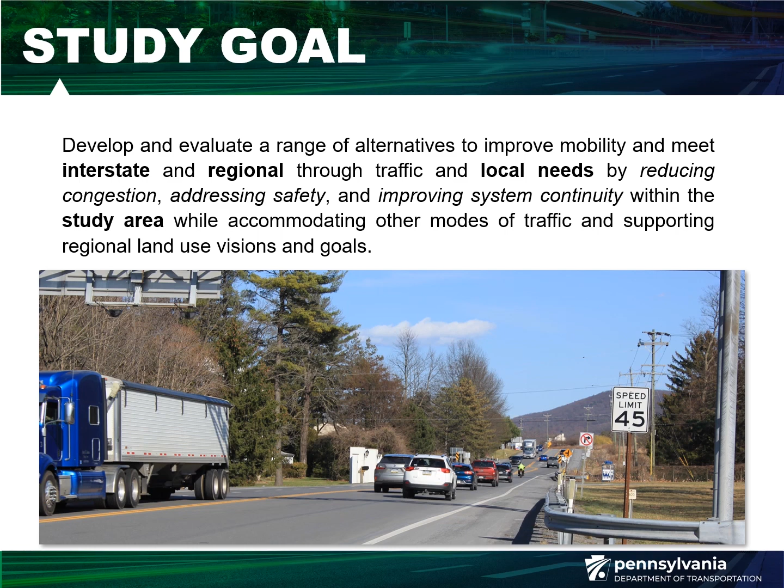Since September, PennDOT has been working to refine the traffic analysis to better identify and understand how traffic is moving through the study area, specifically the various trip origins and destinations. PennDOT used traffic data collected by an independent company called Streetlight, which tracks electronic data from vehicles or cell phones at identified roadway locations. This information documents trip patterns, allowing engineers to enhance the traffic model to predict future traffic for the alternatives. The model can provide a comparison on how the various build alternatives meet the purpose and needs and the roadway network functions.

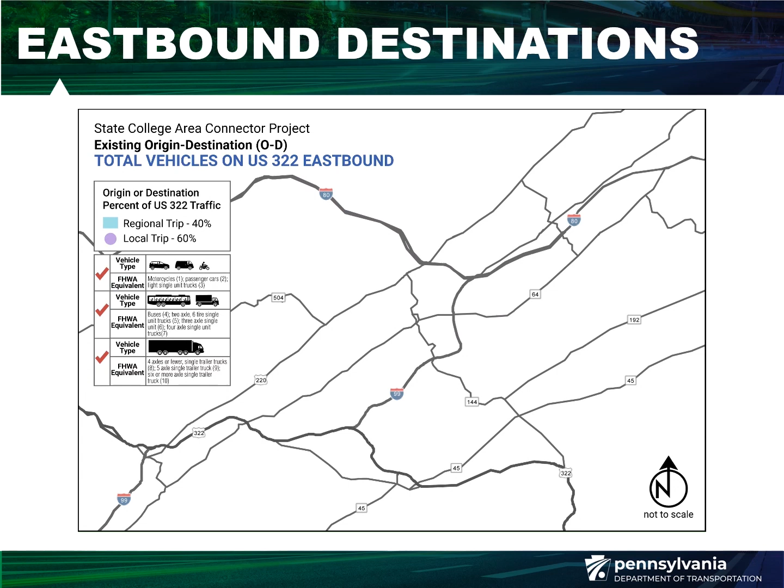The origin and destination study was updated to better identify local versus regional trips by endpoint, direction of travel, and vehicle type such as passenger vehicles and trucks. The traffic analysis determined that nearly 40% of eastbound trips by all vehicle types through the study area were regional in nature, meaning that the starting and ending point of the trip occurred outside of the traffic study area. Conversely, nearly 60% of all trips were local, meaning either the beginning or end point of the trip was within the traffic analysis area for the study.

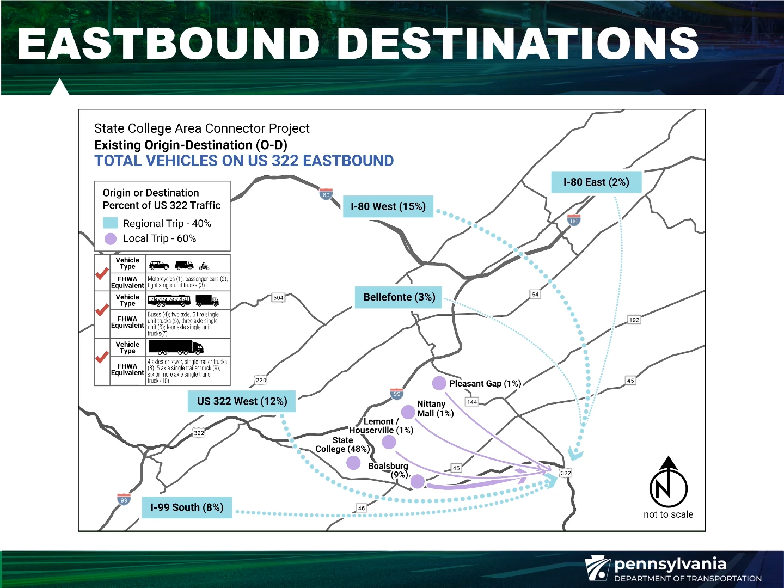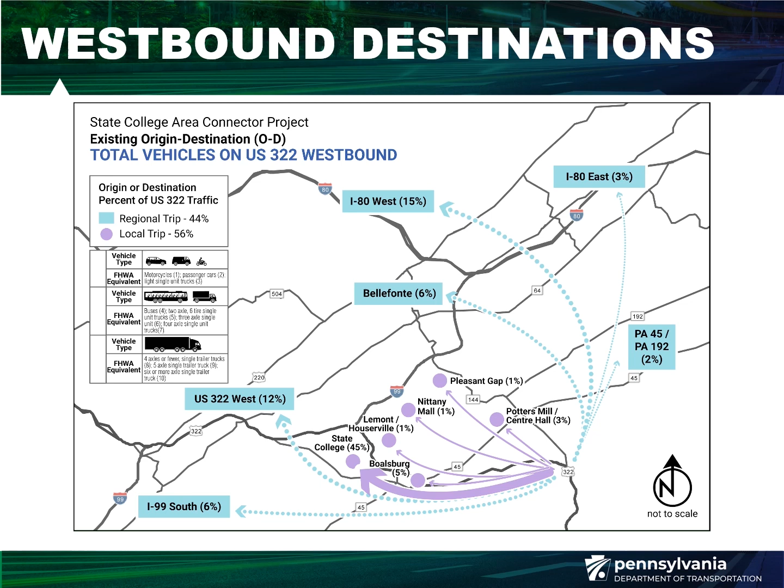Westbound traffic through the study area showed similar results, with 44% of trips being regional and 56% of the trips being local. For both scenarios, the State College area was the origin or destination for more than 50% of all trips. Notable differences were identified when comparing the traffic patterns of passenger and truck vehicles, including heavy trucks such as semis and medium trucks such as local delivery vehicles. Nearly 85% of all trucks traveling eastbound were regional trips, with over half of those trips originating in northwest Pennsylvania or beyond by way of Interstate 80. Only 15% of eastbound truck trips were local trips. Westbound truck trips had similar travel patterns.

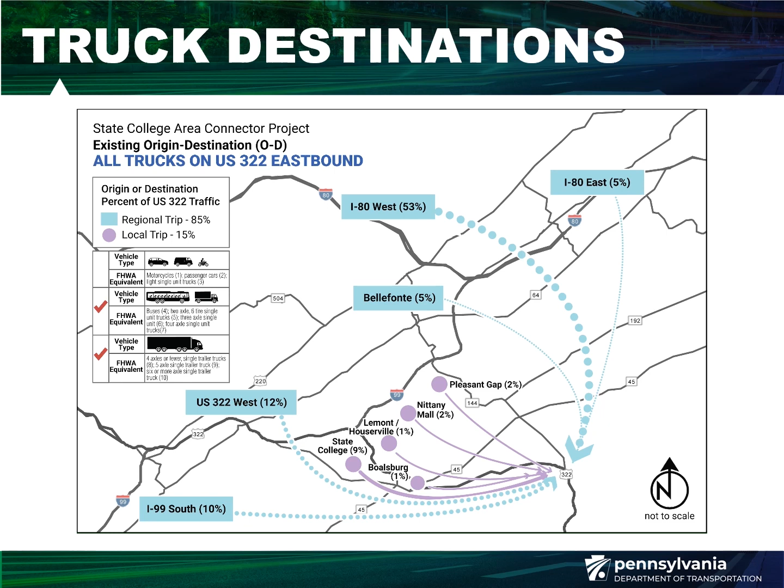Conversely, over 70% of all passenger vehicles traveling both eastbound and westbound were local trips, either originating or ending within the study area. In summary, the findings of the origin and destination study confirmed that passenger and truck vehicles have different travel patterns, and there is a transportation need in the study area to develop solutions to address both modes of travel.

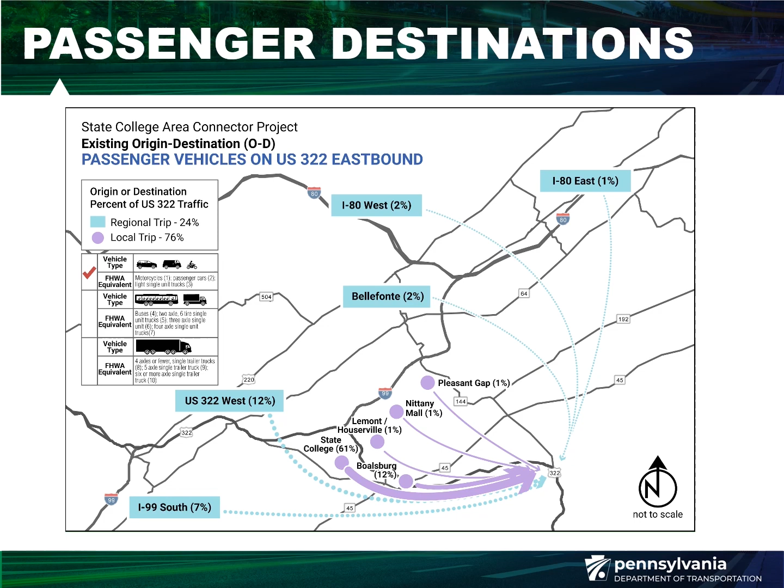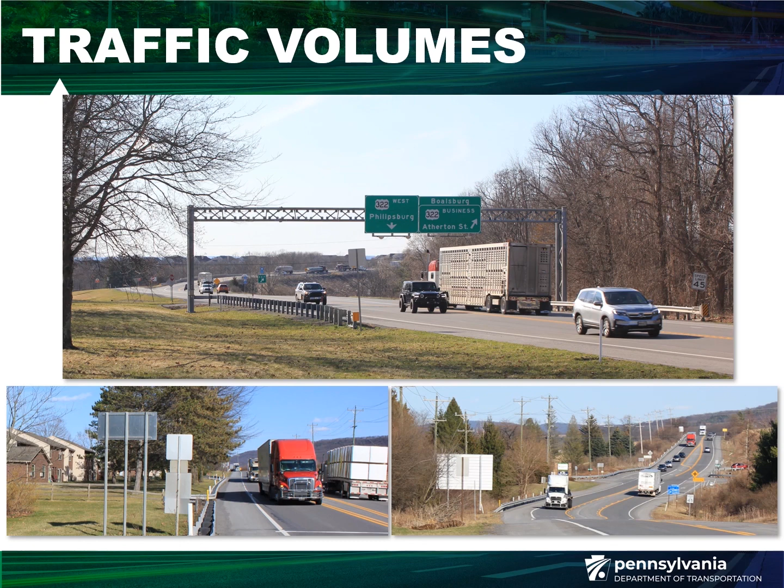Traffic volumes for the no-build, upgrade existing roadway, and various build alternatives were refined based on the origin and destination data and existing traffic counts collected. These traffic counts will be updated during the detailed environmental study and preliminary engineering phases of the project to refine the design of alternatives recommended by this PEL study and ensure that decisions on preferred alternatives are based on up-to-date information. The traffic boards presented in the open house area of the public meeting provide further details on the traffic analyses.

Another area that has been updated since the September 2021 Open House public meeting is many of the environmental resource datasets. Specifically, properties and agricultural preservation programs such as Agricultural Security Areas, Act 319, Clean and Green, and conservation easements were updated. For aquatic resources, new minor tributaries and various stream classifications were also updated. The socioeconomic dataset updates included conducting windshield surveys to identify residential and commercial properties, coordinating with local residents and municipal staff on residential communities, identifying additional subsidized housing locations, and delineating community facilities such as parks and retirement facilities.

Data was also collected to understand and identify the extent of mining operations throughout the area. These datasets are dynamic and change based on regulations or property owner's discretion. The study team will continue to monitor and update each dataset accordingly.

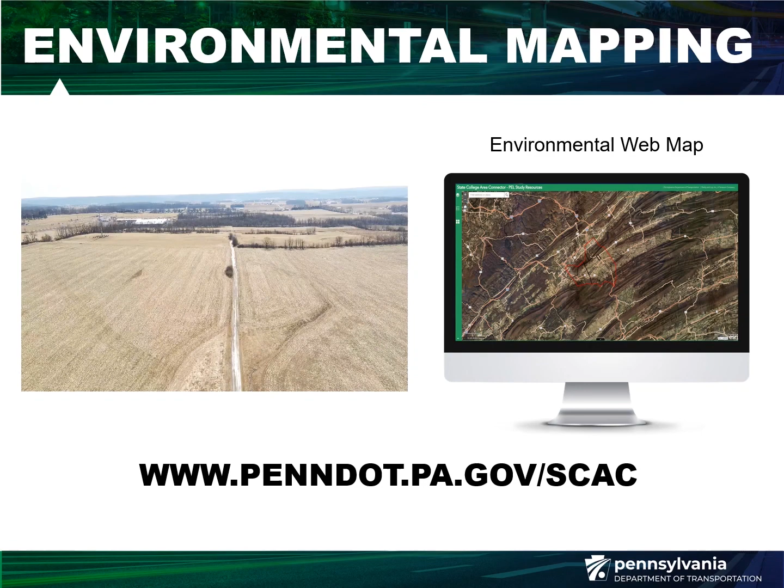While the aerial imagery used as background for the figures and web map were last updated in December 2020, it is the best available aerial imagery for the study area to date. As a result, windshield and drone surveys combined with local outreach were conducted to supplement the aerial imagery until newer images are available. PennDOT is scheduled to fly the study area later this spring.

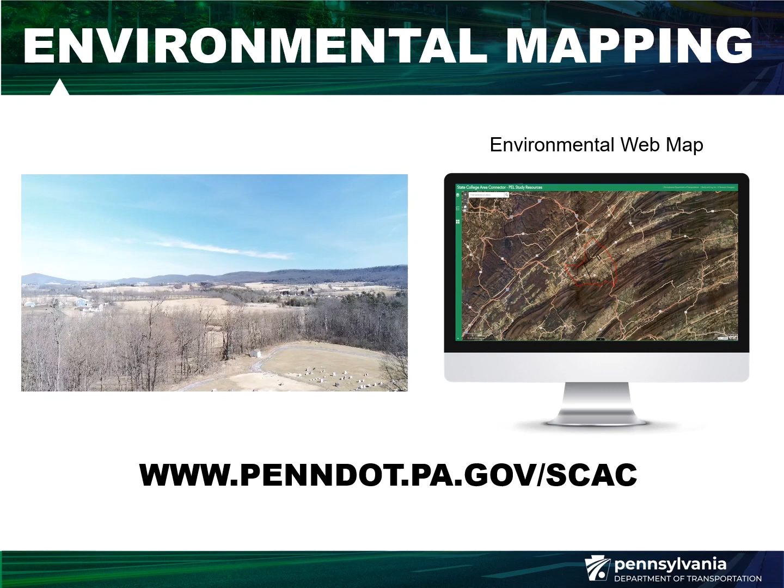The study team is maintaining all various datasets which can be viewed on the study web map at www.penndot.pa.gov/SCAC. At the September 2021 open house public meetings, PennDOT received comments regarding the build alternative corridor design criteria and locations. Since then, the team has been working to refine the planning level engineering criteria to address concerns.

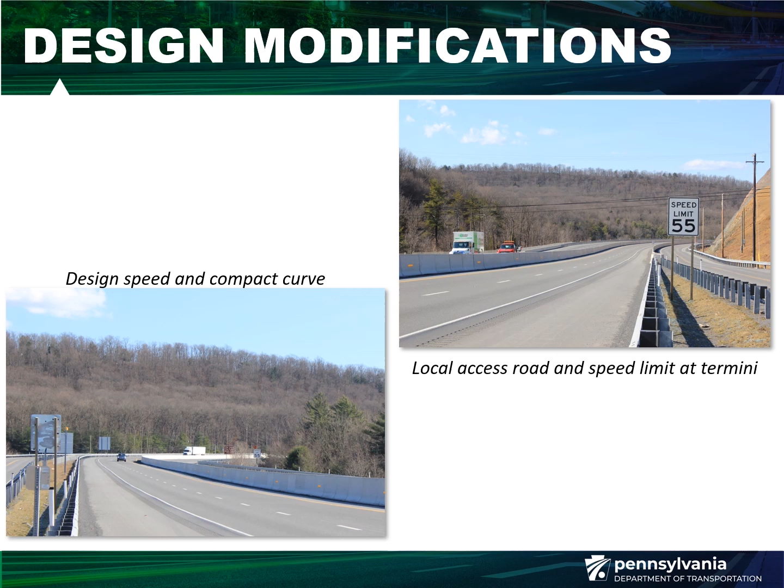Modifications include reducing the design speed to minimize impacts through the use of shorter, more compact curves, and changes to the speed limits to match the roadway facilities adjacent to corridor alternatives. Median widths were narrowed from 60 feet to 36 feet in the more rural areas, and 18 feet in the densely developed and mountainous areas.

The use of steeper slopes in areas of rock cuts was incorporated where applicable to reduce excavation and minimize the highway footprint. Local access of existing roadways with the various build alternative options was also evaluated. Collectively, these modifications generally promote narrower corridors during the planning level of development.

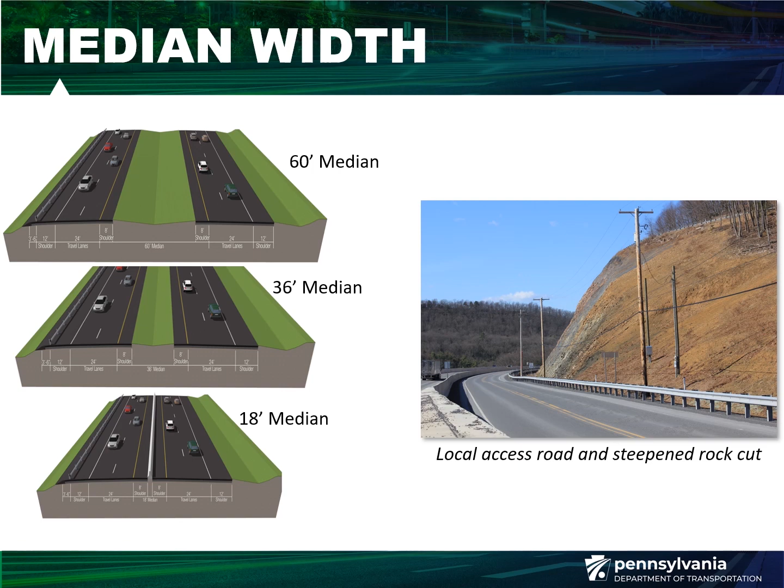In response to public comments, additional study was given to specific areas regarding the physical location of the build alternatives. The first such area was at the eastern end of the proposed US 322 corridors. In this location, comments and concerns were expressed that all the alternatives were located south of US 322. The southern location was initially developed as there are sensitive environmental features associated with Sinking Creek and connecting tributaries to the north. To evaluate alternative locations in this area, 2 additional corridor alternatives were developed and analyzed. These alternatives are presented at this meeting.

The next build alternative location change was at the western end of the US 322 corridors at the connection with the Mount Nittany Expressway. In this area, the corridor alternatives were revised in conjunction with the previously discussed design modifications to better utilize the existing PennDOT right-of-way, thus minimizing potential impacts.

Along the PA 144 corridor, the design criteria changes were implemented along with an investigation to determine if truck climbing lanes would be necessary at Nittany Mountain. As the project progresses into preliminary engineering and detailed environmental investigations, the design for those corridors that advance for further study will continue to be refined to best avoid and minimize potential impacts.